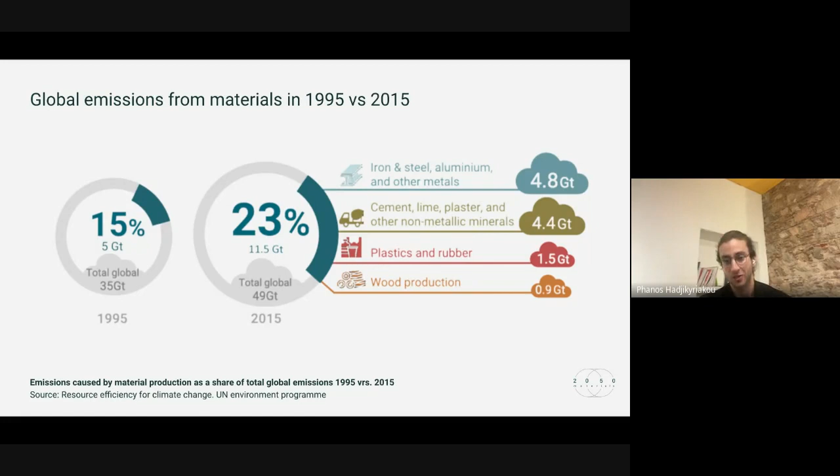However, it's important, and we're going to show this in a couple of slides, to think about the impact of your project as a designer, no matter what project you're building. It doesn't matter if you're a structural engineer or an interior designer, you should always take into account the impact of your project, specifically because lower impact projects like interior design usually have a shorter time span. So across the years, we are still creating a lot of emissions through our projects, and we can actually reduce those emissions.

Now, just to give an indication of the scale of the requirements to do this, there's this amazing piece of work by a Danish group of researchers and industry leaders, which has shown that in order to stay within planetary boundaries, we need to reduce our embodied carbon emissions by 96% in the next 10 years. In a Danish sense, that means going from 480 kilograms of CO2 per square meter of building area down to 20. For any architect here who has done embodied carbon assessments, this is a very, very challenging task, but it shows how important it is that we already start moving towards this direction. Otherwise, these kinds of targets will not really be met.

Now, besides overall emissions of a building, it's important to consider that, as I mentioned earlier, depending on the project type, some types like fit-outs of commercial projects matter a lot. For example, if you're setting up an office for a client and doing the interior and fit-out aspect of the project, even though it seems minimal in terms of the emissions of the entire building, because we change the fit-out of commercial projects every 2.5 to around 9 years, the emissions of all the material that's put there, then wasted and then redone again, can actually end up being 4 times as high as the rest of the building.

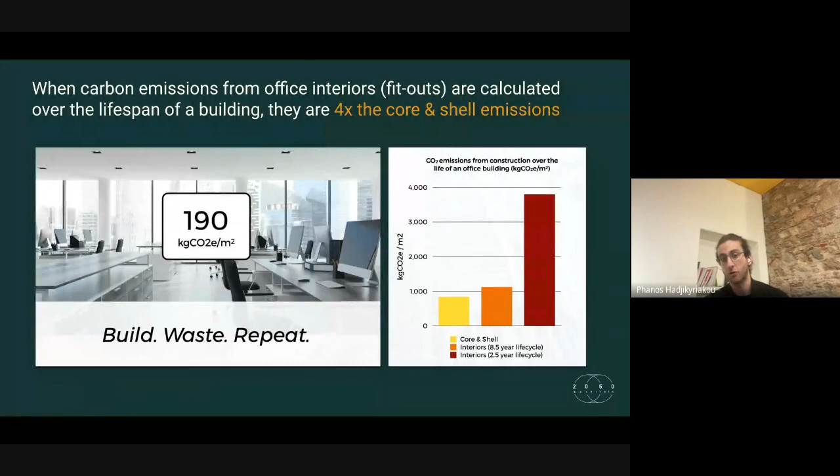Now, we already talked about climate neutrality, and it's important, I think, to define these kinds of terms. The disclaimer here is that there is probably no clear definition, but we can give you what we consider to be the definition of climate neutrality. And then even more importantly, we have a few metrics that are being asked for by clients, which are important to note as a designer.

So first of all, the definition of climate neutrality. Climate neutrality, especially in the built environment, in the construction sector, for us refers to designing, building, and then operating either buildings or infrastructure in a way that overall it doesn't contribute to the overall warming of the planet or the state of climate change. So it's defining it at a level where we're simply not adding to the problem.

And there are a few measures and ways to do that. The typical measures we've been looking at throughout the years to stay climate neutral are, first, to make our buildings more efficient, through energy efficiency measures like better insulation, making sure buildings don't need to use as much energy. The second thing is, if we can, we transition to renewable energy sources, anything from installing solar panels on a building to just getting renewable energy from the grid. Then something more and more relevant to the construction sector in the last couple of years, and a big part of what we do at 2050 Materials, is to start looking at low carbon alternatives and low impact materials, which can be specified and used in buildings so that the overall footprint gets reduced. And then the fourth point is reuse and repurpose.

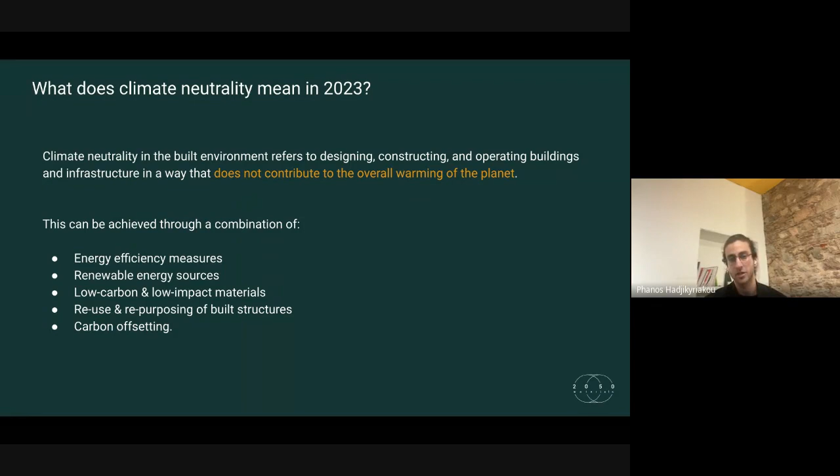So essentially making our buildings and processes more circular. This is massively important. That's the way forward that will allow us to not have to extract more raw resources. And then as a last measure, we put carbon offsetting. Technically, of course, carbon offsetting is one way to reduce emissions, but our view at 2050 is that should be the last resort, especially for the built environment, because there's a lot more things you can do before you need to start offsetting emissions.

Now, in terms of what we hear from the people we work with, their clients are asking for a few different KPIs and metrics that are being tracked. I'm not going to go through the whole list here. This is something you can take a look at when we upload the video, or take a screenshot now.

It's a useful list even when discussing with new clients. But generally, especially because carbon is at the forefront when discussing energy efficiency, the metric that's generally tracked is the operational emissions of the building every year, usually normalized on the gross internal area of the building.

And then in terms of low embodied carbon, we track the embodied carbon of the building, again per area and per year of the building. For those who might not be aware of the technical terms, embodied carbon refers to all the emissions related to the materials of the building, taking into account resource extraction when the manufacturer creates the material, transporting that material to the site, and eventually throwing it out or recycling it.

Now, because we show all of these very quantitative data points and metrics, it brings the question of, does every designer really need to become a specialist in sustainability? And does everyone need to understand all of these parameters?

This is a bit of a call to action for anyone who is a climate conscious designer, which I think most people who have joined the call and are designers probably fall within that category. Now, there are 7 strategies identified as material efficiency strategies for climate action, and we'll take them one by one, explaining each before diving deeper into the actual tools that exist to take action on them.

So the first strategy is: use less material by design. That means if you have the possibility to design lighter structures and use lighter and smaller materials that deliver the same services, then that's always a good idea, because it usually means you're using fewer resources, which often translates into fewer emissions.

Now, the second strategy is, can I substitute some materials for other ones? This is, for me, a really exciting one, because there's a lot of new products out there that are really more sustainable than conventional materials. As designers, it's not just a necessity to start looking at those materials, it's actually exciting, whether that's earth products, mycelium products, anything that is either a new innovative material or something brought back from older types of architecture.

So material substitution basically involves seeing whether one of the materials I'm currently using can be substituted for something that has less of an impact. That might mean exchanging concrete for something like engineered wood or cross-laminated timber. It might also mean exchanging a finish in my wall for something that is lower impact and healthier to the inhabitants.

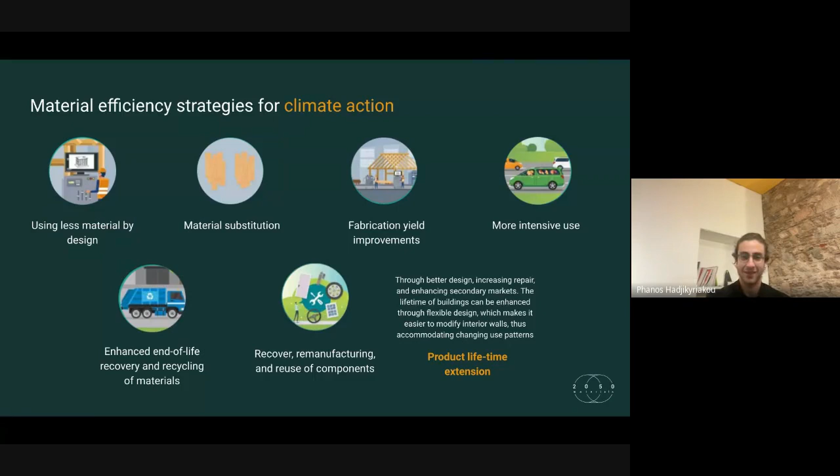Okay, so just to go back to the slide here: these are seven strategies for climate action with regards to material efficiency. A lot of these are somewhat theoretical, so kind of high level. I'd say the next section for me is a very important one, one that personally keeps me motivated to be working on this topic. And that is, what does it actually mean as a designer if you try to do the best available option in terms of your design, in terms of picking materials, and specifically in terms of making your buildings materially efficient?

If there's any section of this presentation I'd love people to remember, it's this one. The simplest way I can explain this is: without assuming any new innovations, without assuming anything changes in the grid, just by the choices of materials that exist today in the construction sector, whether you're designing an interior design project or building an entire building, if you take correct decisions and switch materials for lower carbon ones and try to optimize the efficiency of your buildings, you can reduce 40% of each project's emissions.

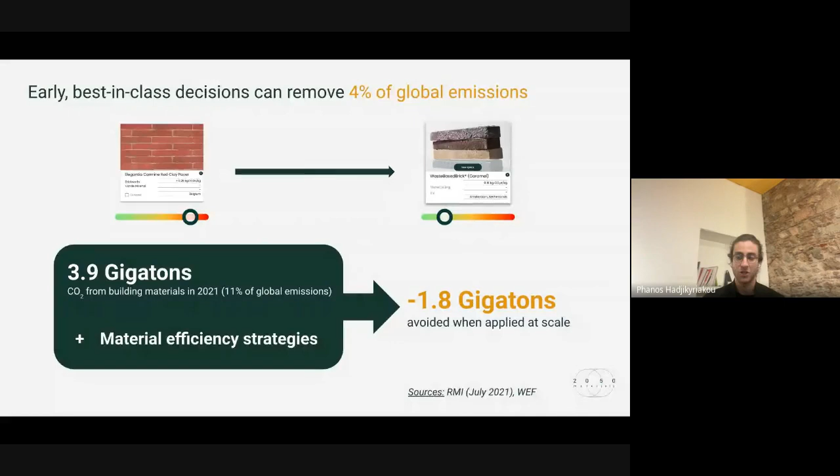It doesn't sound like much if we say 4%, but imagine if you had the entire emissions of the UK, or the entire UK not emitting emissions for a year. Now imagine having that twice, three times, four times.

So if you're a designer, you have a disproportionate potential to reduce emissions versus any other profession, in my opinion at least. It's extremely important to really start getting on this and start reducing emissions, because the amount of impact you can have is really very, very large.

Okay. Having said that, I'd jump to the tips and the cheat sheets and tools we put together, and then continue with a small demo.

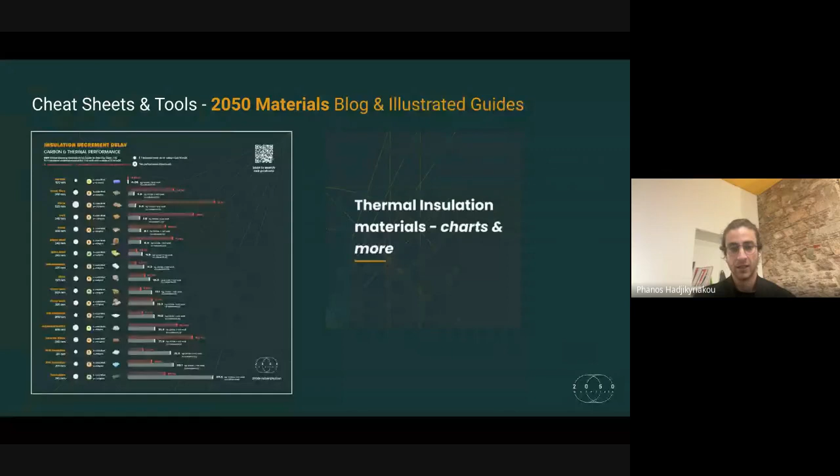And then finally, we have the actual tool we've been working on for the last year. It's been a journey, to say the least. So I'd like to spend a couple of minutes showing at least some features of our tool. We probably don't have enough time to run through everything, but I'd like to give a sneak peek of what we've built up to now.

And if anyone is interested in diving deeper, you can do that by registering—it's free to register on app.2050materials.com—or you can just reach out to us and we can give a more elaborate demo.

I'm going to have... Okay.

And after the demo, we can of course start answering questions. I've seen that some people already posted their questions.

So as I said earlier, this is the main tool we've been working on at 2050 Materials. It's accessible at app.2050materials.com. We can also post the link in the comments.

There are essentially two sides to this platform I'd like to show, and I think the best way is to assume we have an actual project we're working on as a designer. I know this might not represent every designer on the call, but I'm just going to assume we have an architect working on a high-rise residential building. I'm going to start not from the library of materials, which I think a lot of you have seen already, but more from the tool side of things.

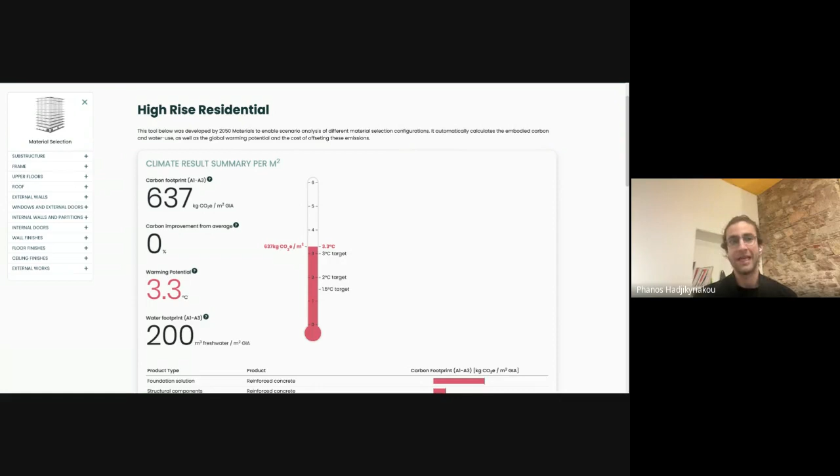So what you can do here is automatically get the embodied carbon emissions in the upfront lifecycle stages, A1 to A3, per meter squared of building, as well as how that compares to an average building in the UK in this specific example, and what that means in terms of global warming potential.

This global warming potential is, in a way, our translation of this footprint into what it would mean if every architect in the world was building high-rise residential buildings exactly like this one.

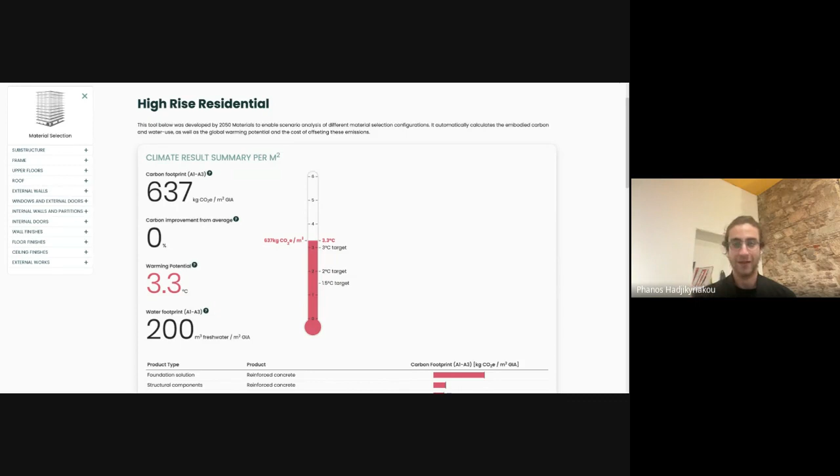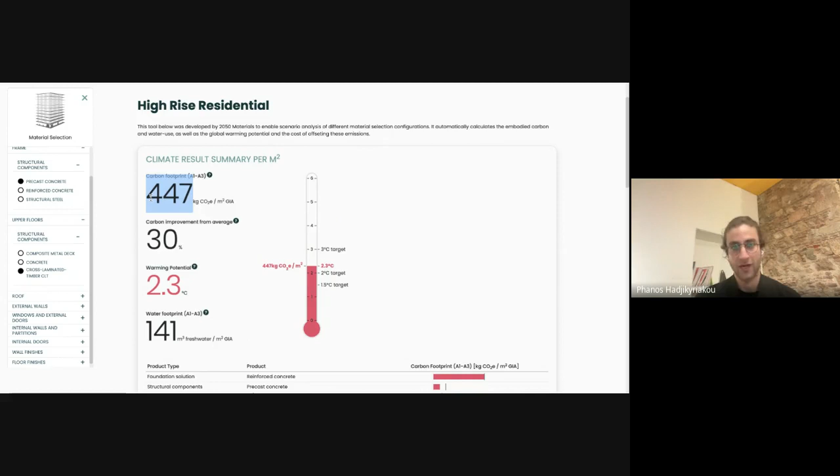Besides these basic metrics, you can see the list of materials selected, and understand where most of the footprint comes from. Then the interesting part comes in this filter aspect, where you can open different components of the building and select all kinds of pre-calculated materials, so you can see what you can do to get, for example, a 2-degree compliant building, or one at 400 kilograms of CO2 per meter squared.

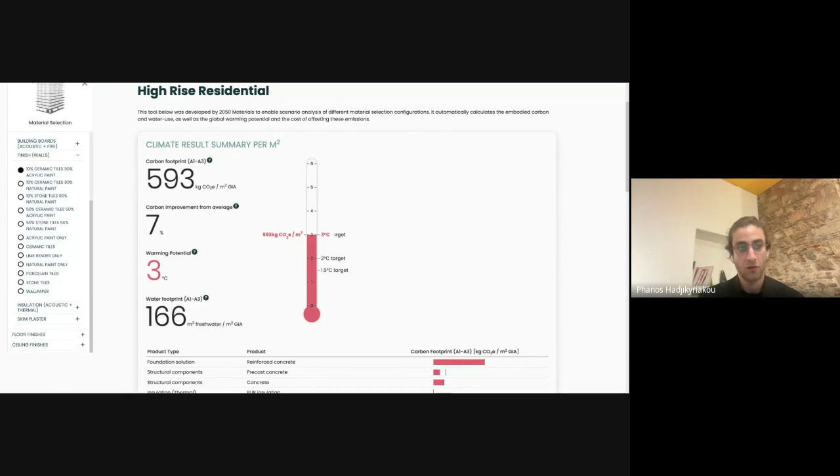The materials around this building span across all parts of the building. You'll see there's stuff for the foundation, the substructure of the building, all the way down to what I'm using on wall finishes in terms of tiles and paint, or what I'm using for the floor, the ceiling finishes, all of that.

The idea behind this is to play around with materials, click on different options and understand what is achievable. But then also something very important is to put this in the perspective of the actual project you're working on.

An easy way to do that is you can enter the area of the building, the projected occupancy rate, so how many people would actually be housed in this example, as well as how long you estimate this building will be up for, essentially serving that value. You can also enter the estimated value of the project.

The idea behind this is that, as I mentioned in the presentation earlier, it's important to think about the intensity of the use and how efficient the design is for the building. So looking at the total carbon of the building, or even the total carbon per meter squared of area, is not always the best approach.

So what we've done here is break that down into a yearly carbon footprint, as well as a per-person carbon footprint, so that if you're designing a high-end residential building and housing a lot fewer people because you're creating much bigger apartments than doing something of a lower range, you can actually see the impact of that type of design.

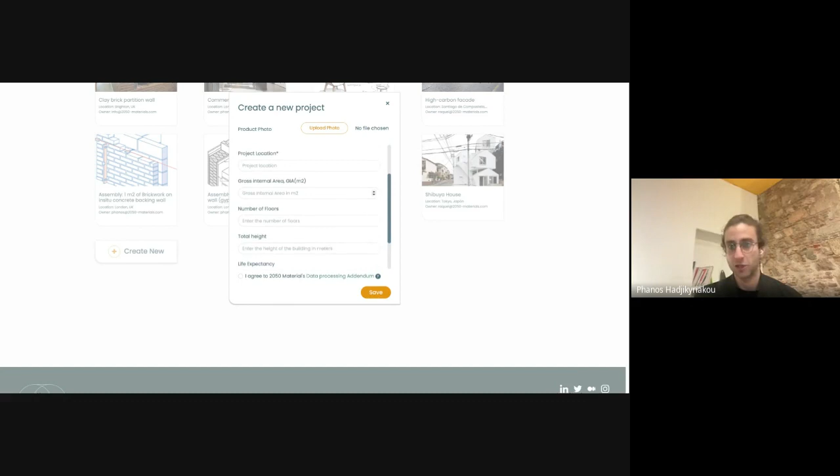Because we don't have all the time here to explain how to create it from scratch, I'm just going to show an example of one of these projects.

This example is essentially a residential building at stage 1 of the design process, something that still does not have almost any decisions locked in terms of design. So we want to start considering specific materials and seeing what we can do better.

In this tool, after you've defined the basic data points, you start selecting materials for each part of the building. You can see here that I'm considering a certain type of concrete in my substructure, concrete again in my frame, and some type of timber for the floors, and the list goes on.

Then if I go to this configurations table, you'll actually see the list of materials broken down in this table with actual quantities.

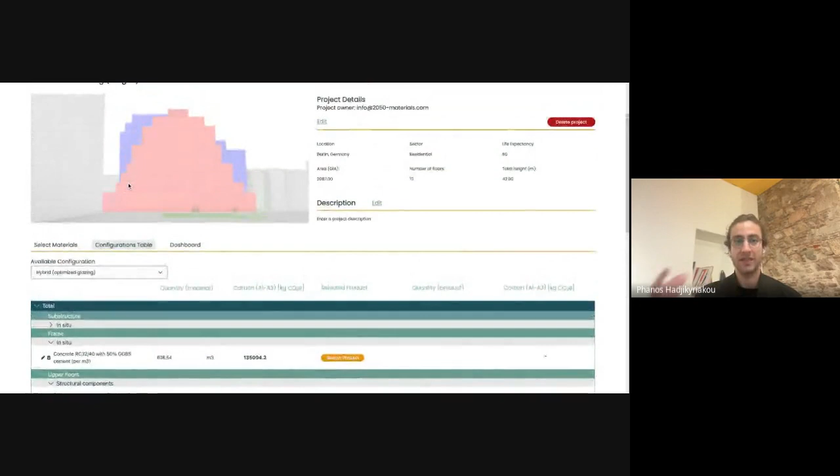That means I can open and see how much concrete I'm using in my frame, how much timber I'm using in my floors, as well as how much paint I'm using in the wall finishes. The tool I shared earlier is a very generic one, high level, assuming specific quantities for each part of the building, but not representative of all typologies or designs you might create. So this is the opportunity to start entering more real quantities to identify the actual footprint of this building.

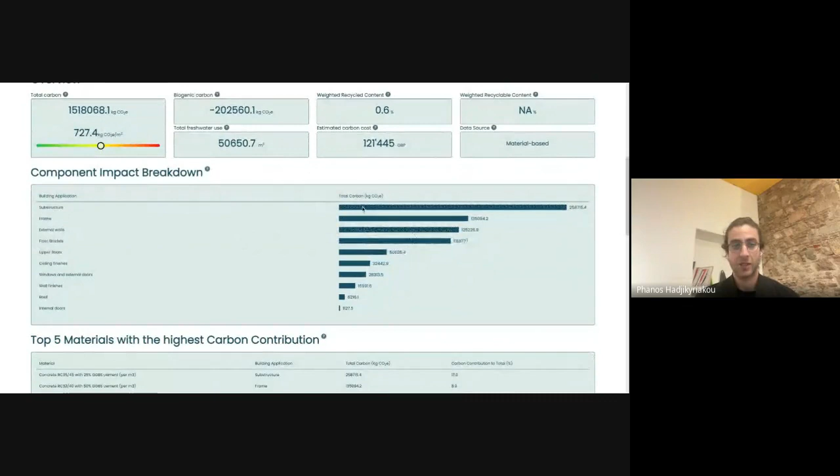You can enter materials and quantities, and then get a life cycle assessment of the embodied carbon, which includes a lot of different metrics. This includes the embodied carbon footprint, separated biogenic emissions, some circularity metrics, amount of fresh water used to manufacture those materials, as well as different graphs that break down emissions per part of the building or per life cycle stage—to understand whether emissions come from transportation, because you ship materials from far away, or from end of life, because they're not recyclable or reusable.

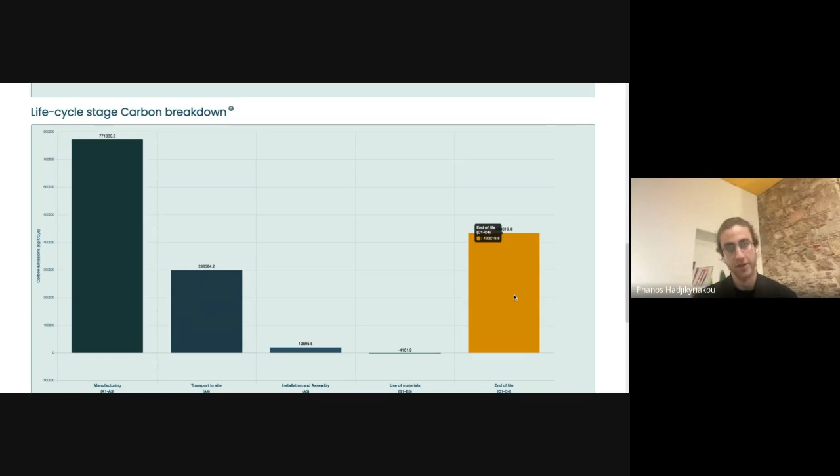The reason you'd want to tap into the library is to actually find the real products applicable for your use cases. That might mean filtering the type of material the paint is made from, or the manufacturing country to minimize transportation emissions, or things like fire performance if it's reported, and also any certifications you might need to get the building-wide certification.

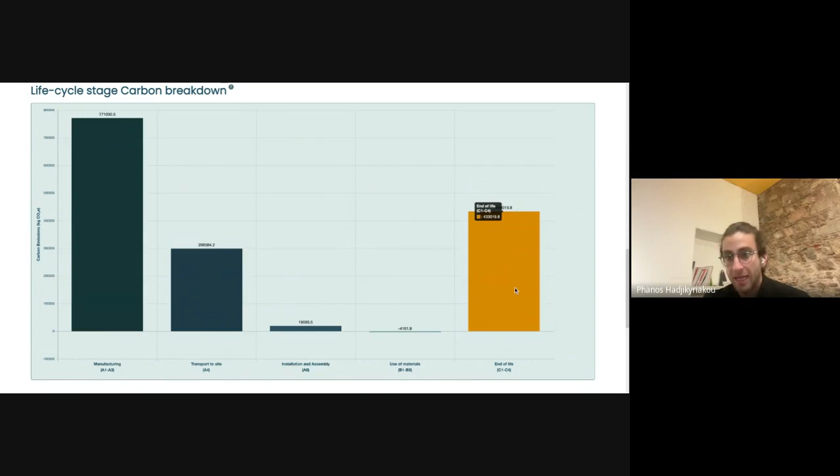What life cycle stages does your system cover in the calculations? If I can switch back here - the tools side, the projects we showed, really cover the whole life cycle. If I go to the dashboard, you'll see we cover A1 to A3 emissions, but also transportation to site, installation, use of materials, and end of life of products. Most of that comes from EPDs of materials, but some is calculated by us, modeled taking into account the location of the products and the project.

How can recycled content be used as a KPI for reusable materials? Recycled content is essentially the upstream aspect of circularity. This is a bit complex to answer in a few seconds, but whoever posted the question, we're happy to share some of the circularity metrics we've developed and what role recycled content plays into those. You can always send us an email or a contact request through the website.

Maham posted three questions. Can you benchmark only baseline buildings in the UK or other countries too? On the embodied carbon tool I shared, our benchmarks are currently still UK based, although you can adjust the industry benchmarks if you have other countries' benchmarks. We have researched benchmarks in different countries, but we're most comfortable with the UK ones because we simply haven't researched other markets in as much detail yet.

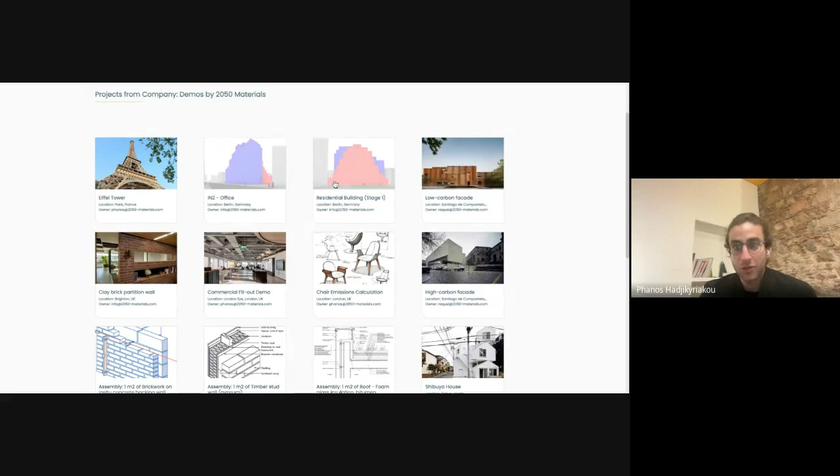What if the project is community-wide? Can we add multiple types of buildings under one dashboard to assess them together? Really good question. Our projects tool is actually extremely modular, and it almost happened by mistake. It was initially intended to assess one building or project, but we've seen use cases, even joke ones like estimating the embodied carbon of the Eiffel Tower, and also use cases for a single assembly, like an internal wall considering just one meter squared of brick, or a fit out example. So yes, you can use this tool however you like. If you have the quantities and materials for a community-wide project, you can absolutely put them together in one dashboard and understand the impacts.

How do we calculate the baseline building? We don't calculate the baselines in this embodied carbon tool. We basically look at research on average numbers for different types of buildings.

Specifically in the UK, from an organization called LETI, we use numbers they come up with by aggregating industry data. Leanna asked if reclaimed materials - windows, kitchen, insulation - are better than new ones in terms of sustainability metrics, and whether that can be measured with our tools. The answer is yes, it's definitely better if you can reuse materials, because you avoid the emissions of manufacturing from scratch. Unfortunately, you cannot yet measure that with our tools. We are creating a database of average data for reclaimed materials, seeing the impact of a reclaimed window versus a new one. It's a working process, in our pipeline but not available yet.

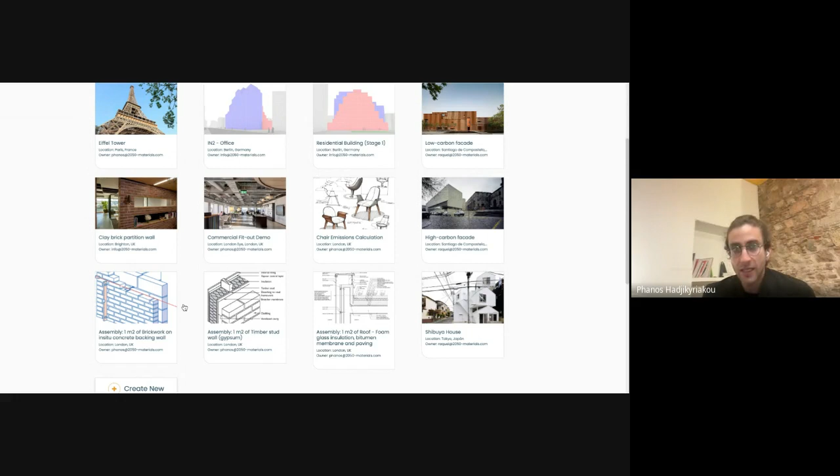Anna Sofia asked if there's an option to collaborate on a project in the app, to invite other designers. Yes, absolutely. If you work in the same organization or under the same project, you can reach out to us and have multiple collaborators on the same project. Going back to the use case, these projects are modular because if you're working on a specific assembly like the wall or floor, you should focus on that part of the building, then you have the ability to combine all of that data into a single project at the end to deliver the dashboard.

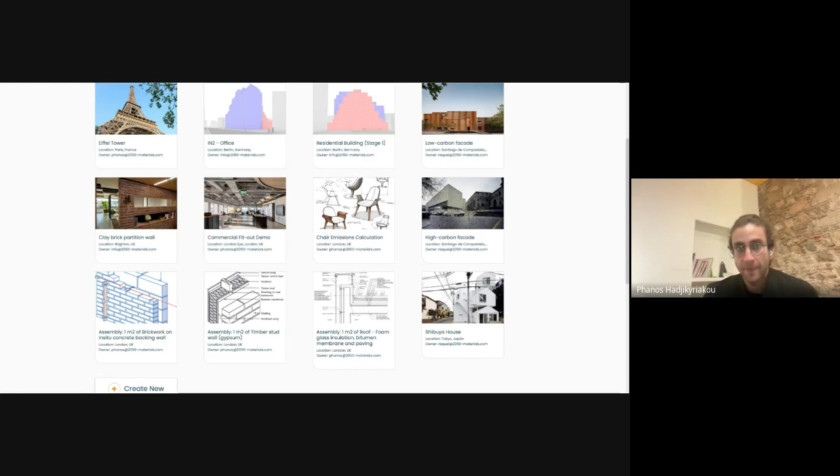The final question is from Chris and Mac: how long until we get the client target definition module? Chris and Mac were referring to the tool where you define targets as a building owner. This has been a placeholder on the platform for a while. We already have a developed tool, just not built into our platform. If anyone is interested, reach out and we can show how it works. In terms of when we'd implement it in the platform, probably in the next couple of months, though we don't have a specific date yet.

Another question, probably the last one, from Mirto: is it possible to show the emissions of a material based on a specific unit, like insulation in kilograms of CO2 per meter cubed? This is a feature coming very soon on our platform. You'll be able to select the unit for viewing embodied carbon data, whether that's meters squared, meters cubed, or anything like that. We're currently working on a breakdown, a feature where you select the unit and see everything in that unit.